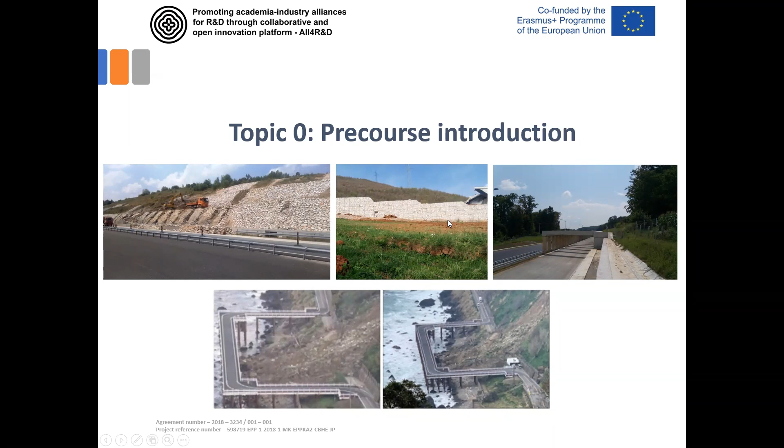Today we won't go very much into details regarding the outline of this course, but we will discuss some details. What are we planning to do in those 10 hours of lectures? We'll define the outline of the course and show you what we'll work on and discuss. So the title of this course is, as you know, landslides in highway construction.

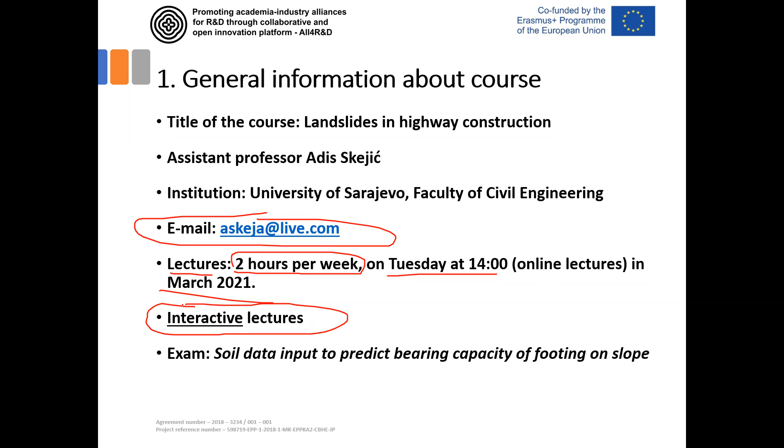Regarding the exam, we won't have a typical exam where we ask you for something and you give answers. It will be some kind of interesting content where I will give you one practical example. We'll prepare this exam question at the end of this course, and I'll prepare one practical example with soil data input. So you'll all have some slope. There is a surcharge from some additional load, such as a foundation of a structure built near the slope area.

And then I'll ask you for some input parameters of this material to try to predict the result of this problem. The result can be to predict the bearing capacity of this footing on a slope, or just to define the load settlement curve for a problem of this kind.

So you will all have the same input data about soil, but you may use different theories, different empirical approaches, numerical approaches to gain the results, and probably the results will all be different, and we'll then use all of your results to prepare some discussion about it and to try to gain some knowledge regarding the design of structures or roads on slope areas, similar to the thematic we are discussing here.

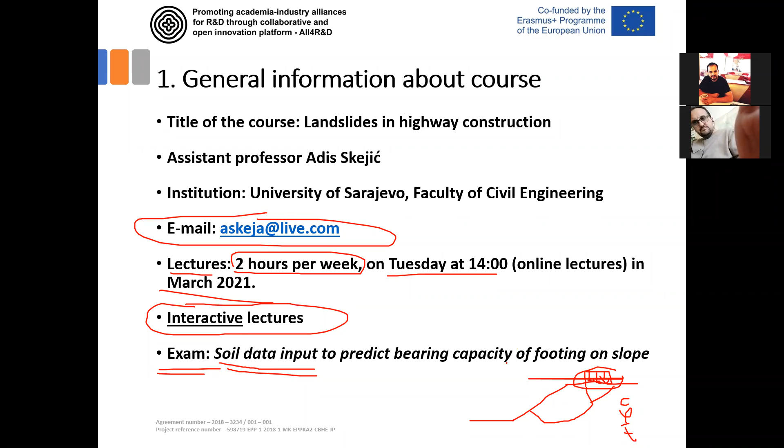A short description of the course can be separated into these 5 groups: 1, 2, 3, 4, and 5. The first one is the introduction, where we'll spend some time today to discuss this issue and present some basic information about the subject. The name of this subject is landslides in highway construction, but at the beginning we have to separate 2 aspects of this problem.

The first one is the building of highway construction in landslide areas. That's one possible problem, that we need to pass our highway through some landslide area, areas prone to sliding or potentially unstable areas. And the other, less frequent problem is that we have landslides activated due to highway construction. So we definitely need to separate these 2 problems.

The one we have at the beginning, before we construct the highway, is highway construction in landslide areas. Then we have to be prepared to construct the highway, to prepare some structures, drainage, and so on, so that the highway is functional and stable during the next years of exploitation.

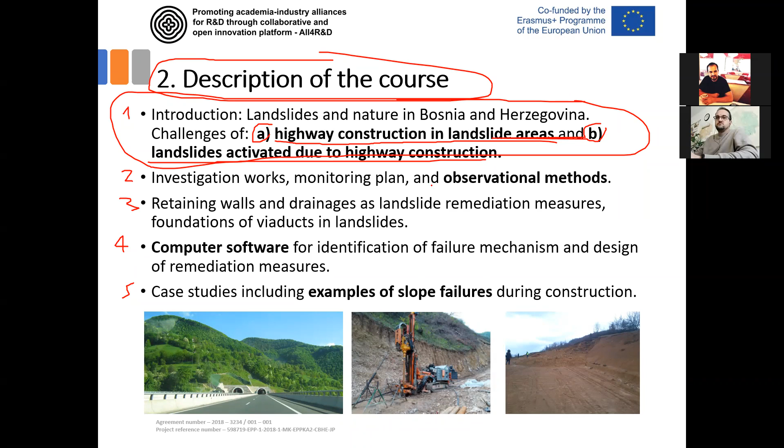So I'll discuss some basic information here, and I'll give some local experiences from the highway construction in Bosnia and Herzegovina, with some practical examples in both of these cases, A and B. That will also be the first part of these lectures, the so-called introduction, where we'll discuss some basic mechanisms of sliding, and the most often landslide types observed in the local highway construction practice.

The second part of the lectures will be the discussion on the investigation works. That means the engineering geological investigation works that are the first part of route planning before the highway construction, but also later, if some sliding occurs due to highway construction, we can do investigation work to try to understand the sliding and soil failure mechanism.

Additionally, with the investigation work, we'll discuss the importance of monitoring in solving landslide related problems. We'll describe different types of monitoring techniques that are used during the remediation of landslides, no matter whether they are active before the highway construction or after the highway construction.

Finally, in this second part, we'll discuss one very important and very often used design method in practice, the so-called observational method design. We'll define different approaches of these methods that are really very often used in worldwide and local practice as well.

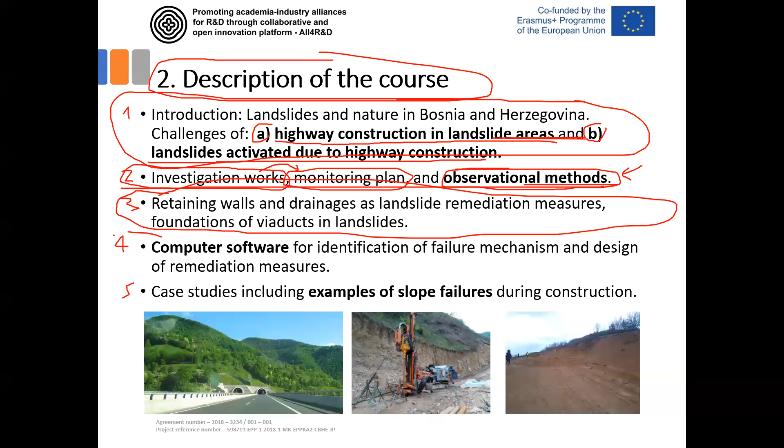The fourth part of these lectures will show you some details of computer software that is used for identification of the failure mechanism in the first phase, and then for the design of remediation measures after we have identified and confirmed the failure mechanism observed at some particular location.

Nowadays, different types of computer software are used. Some of them are based on the limit equilibrium concept, and some of them are stress-strain numerical analysis. And there are so many programs used worldwide. We'll show some details and capabilities of different techniques for solving all kinds of problems, like foundation of viaducts in landslides, remediation of a failed slope during construction of the highway, or simulation of a highway route passing a landslide that requires retaining wall construction or counterweight design.

We'll show different examples and different solutions of how it can be combined with computer software programs to predict the safety factor as the main aspect, showing the stability of a slope before and after remediation.

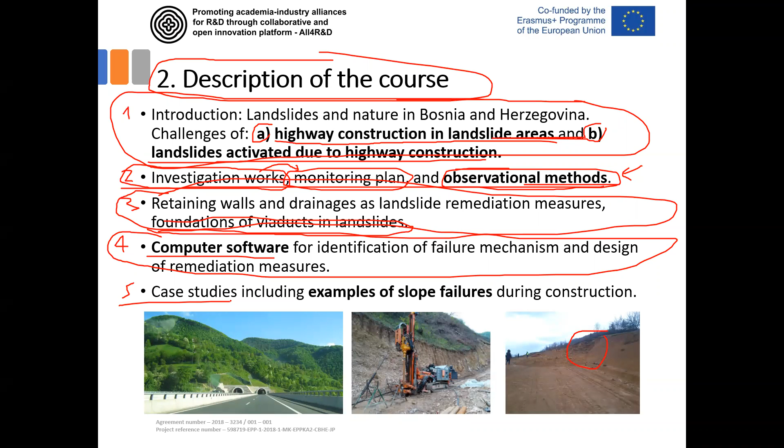Part 5 includes case studies and different examples of slope failures during construction of the highway. All of these case studies are actually local examples from Bosnia and Herzegovina of failures, with details of investigation work, monitoring performed, computer software analysis, some drawings and details of the remediation measures, and some useful information, problems and solutions performed during the construction of the highway in these kinds of areas.

This subject that relates highways and landslides can be found in the literature. Well, we are not the only area in the world where this problem is occurring. This problem is really worldwide. You can find plenty of slope failures that cause large problems, not only during construction, but even after the construction of highway. Here are some examples from New Zealand.

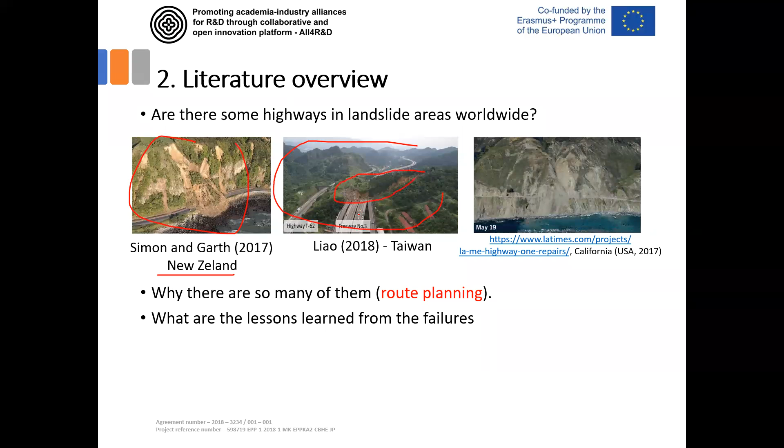An example from Taiwan, where all the hill practically slid down to this constructed highway. Here is one GIF video showing the failure of the rock slope in California, USA. It's all from the near past. So this is not something new. This is something that is happening very often worldwide, not only a local problem.

Why are there so many of these failures worldwide? Well, one of the most important problems is actually route planning. Route planning is really something that a lot of time should be spent on when discussing the way some route will be located, will be planned.

Some expert that is doing the route planning should really have a lot of experience, and he should be a practitioner not only in one subject, not only a road engineer, not only a geological engineer, not only a bridge design engineer. It should be a person that knows a lot from all these areas. And it's not easy to find a man with that kind of capabilities.

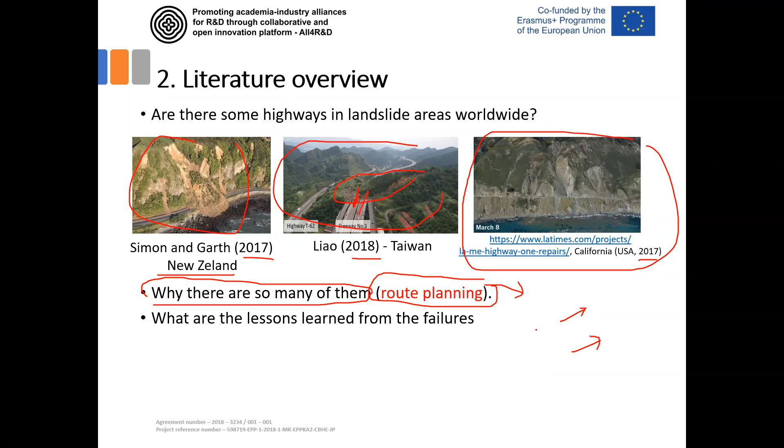before it becomes too late and you already have some structure constructed, and then you start dealing with the landslide prone area, potentially unstable areas, and then you have to spend really a lot of energy, a lot of money to construct a road in such conditions. And even after that, you're not totally sure that you have a stable, long-term, and safe construction.

That's also a part of this last sentence, to show you some lessons learned from the failures. Every time we observe some failure, we can easily predict it in the future, and we can escape it in some future work.

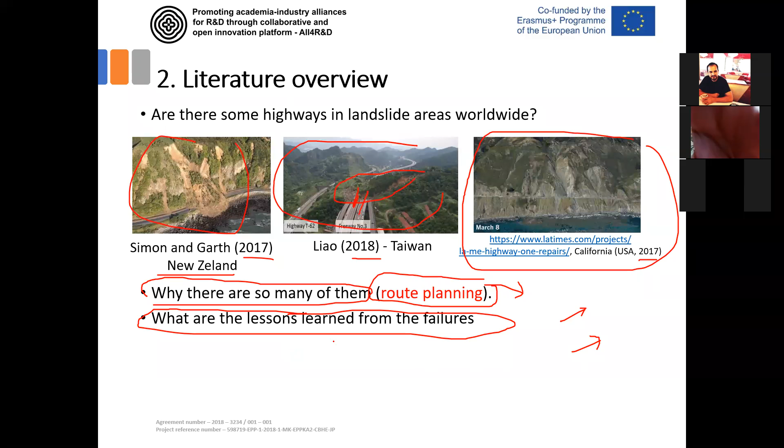Some aspects of slope stability we actually won't discuss in this course, and it's often a problem during highway construction. I sorted them in two problems. The first one is so-called mud flow, where you have a surface erosion that can influence the functionality, the serviceability of the highway route. And the other problem is rock mass instabilities.

Because it's not that rare that we have some deep excavation, not in soil but in rock mass, and deep excavation in rock mass can be as critical as the slopes in excavations in soil, especially if you have very weathered, not so firm rocks. But as I said, we won't discuss that. It may be part of some other subject, of course, but I found it useful just to say what we will not discuss.

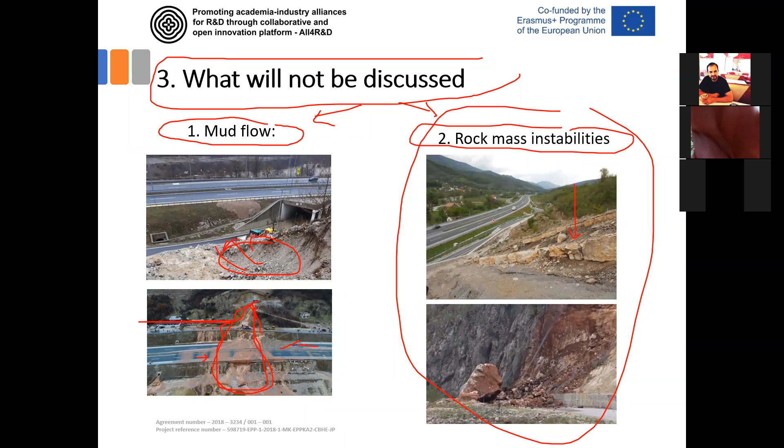That's one part we won't discuss, and the other part is rock mass instabilities, because every time we have deep excavation, even if it's in rock, it can cause some instability that could bring a lot of problems during and after highway construction.

What should be the learning outcomes after all these lessons? Well, first, and that we'll discuss in detail today, is a typical landslide mechanism for the landslides in Bosnia and Herzegovina. Unfortunately, I don't have much experience of landslides worldwide or in other countries, but what I can discuss is the sliding mechanism observed in most of the landslides activated during the construction of highways in Bosnia and Herzegovina. I'll try to share that experience, but I believe that similar conditions can be expected in the neighboring countries.

And this is something linked with the first part we'll discuss today. This is the part about how the landslide starts, why it starts, what are the main reasons for landslide activation, what is the failure mechanism, what are the basic elements of a landslide, and we will discuss this today.

As we said before, we have these five major topics, and every topic has some learning outcomes. The following learning outcome is that we'll show the importance of the investigation works, monitoring works, and observational methods in prediction of slope failures, in construction of the highway in landslide areas, and in the remediation of landslides if it's activated after the highway construction.

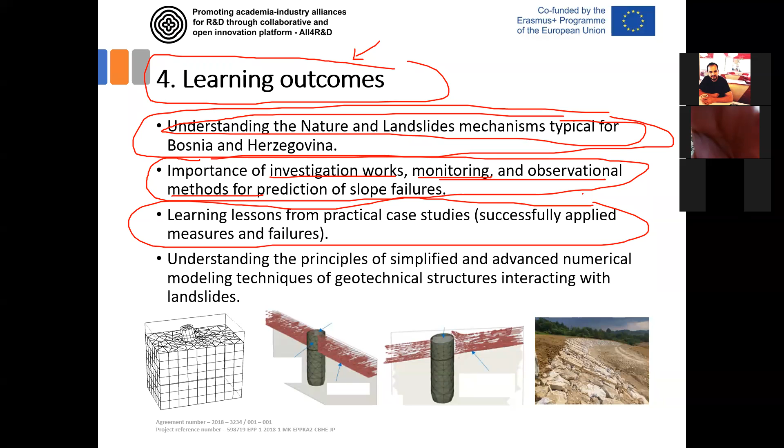For every case study where we had some failures, some sliding of the soil, some problems with the serviceability of the highway, we'll show the case studies. We'll show the details of applied measures and failure mechanism, and the outcome should be that we learn something from those practical case studies and then try to escape similar problems in the future when we are dealing with this kind of problems.

Also, we'll try to explain so you can understand the principles of some simplified and advanced numerical modeling techniques of geotechnical structures that are interacting with the landslides. So we'll show what information we can get from numerical simulation of retaining walls, anchored walls, and deep excavation of foundations in the landslide area.

As I said, we'll show the details of one practical example where the highway viaduct passes in a very deep landslide area, and then we'll define some main aspects of the design of such a complex foundation structure.

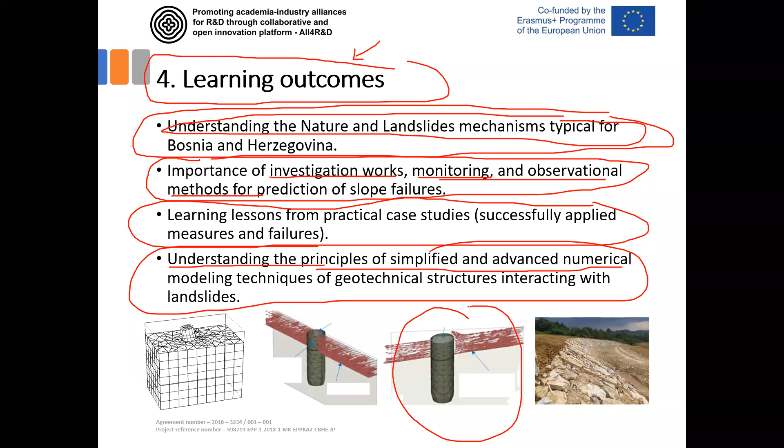Of course, we don't have time to explain all the details, but as I said at the beginning, if you have something you're interested in, you can always stop me and ask for some details, and even further, if you want to go deeper in this subject, you can try to prepare some calculations, try to prepare some design, and send it to me to check it and to give my feedback on that if I can help you at all.

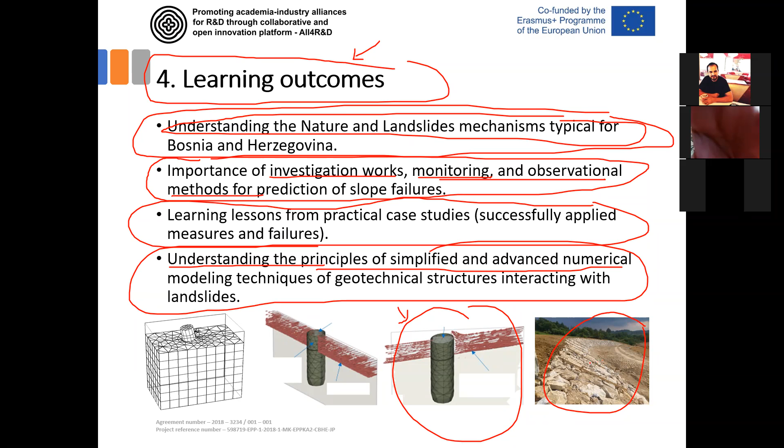So we'll discuss deep foundations, retaining walls, counterweights, stone column materials with drainages. How can it actually be modeled, to introduce it into the calculation, and then to check the safety factor of these conditions with the support measures?

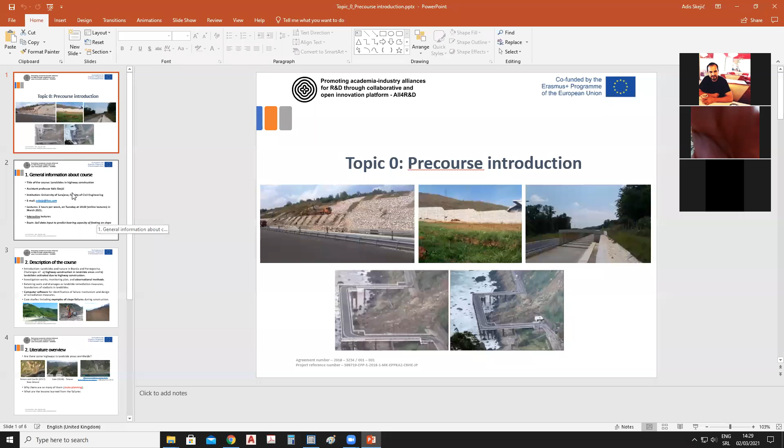Okay, that was a so-called pre-course introduction where I just introduced what we'll discuss in the next 4 weeks and some part of it today. So the so-called rules of the game are that you can follow the online lecture, and to make it more interactive, you can ask me something, I can answer it if I know, so we can discuss it. And if not, I'll send you the video link so you can follow it later when you find some time for that.

And at the end, we won't have a typical exam. It will be just like a kind of game where I'll give you some geometry and soil input data or some field test result data. So you can then interpret the field test result data to get the input parameters and do some theoretical or empirical approach to predict the bearing capacity or load settlement curve of some foundation on a slope area.

So it's somehow linked with this subject where we have highway construction on slopes, and then we'll collect all of your answers and do a short discussion of why the results are the same, why they are different, where the differences are, what you often use as the principle of interpretation, and what you often use as a theoretical, numerical, or empirical approach for predicting the results of some problem.

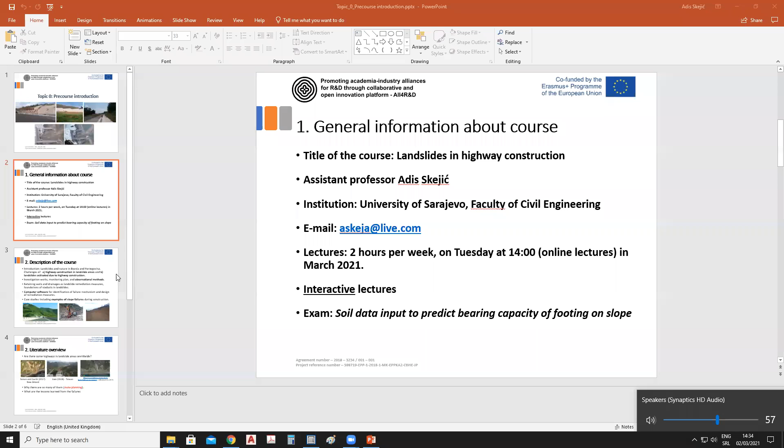We may add some details about that when we discuss the retaining walls part that I introduced here. This is retaining walls and drainages as landslide remediation measures. Actually, in this original presentation, I didn't prepare any details on soil nailing or rock nailing techniques, but why not? I can add a few slides that will discuss

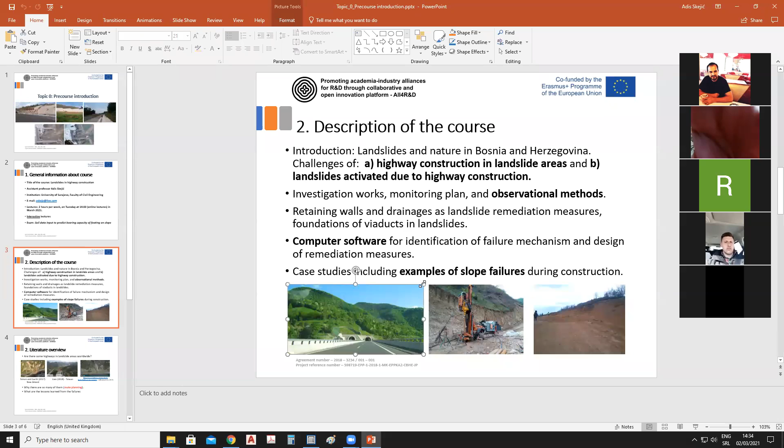tunnel entrance construction. We have one similar problem in our case study part. In the case study part, this is this problem. What happened here? This was a temporary construction of the tunnel portal here, but after that, it was designed to prepare this long-term condition, and this is a reinforced earth slope. Reinforced earth slope that will support this temporary construction of the tunnel portal. That is actually rock nailing, and this was a rock slope here.

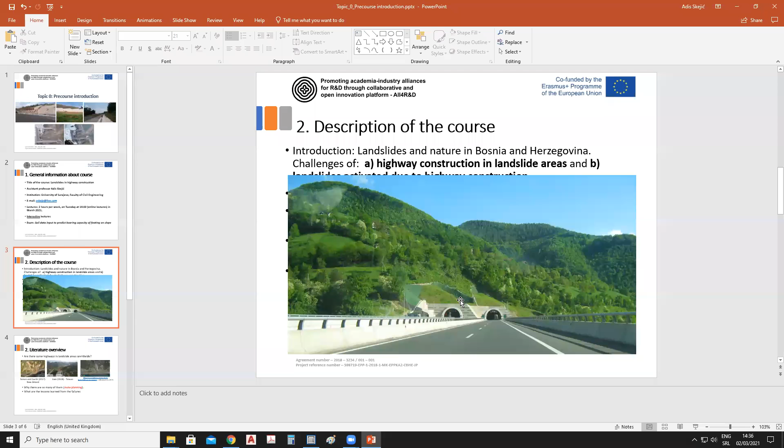But the main problem occurred here during the construction of this reinforced earth slope. After the construction of this slope, failure occurred and influenced the stability of this area. So some supporting measures were performed here to stop this sliding. So it's a little bit linked to this theme, not directly, but we can add a few information about how it works, since this portal construction is often temporary, not always, and then it is supported by some construction like this one here.

So the answer is that we will give some information concerning that. But you can see here, this is soil nailing as a temporary support, and this is a long-term support, this reinforced earth wall.

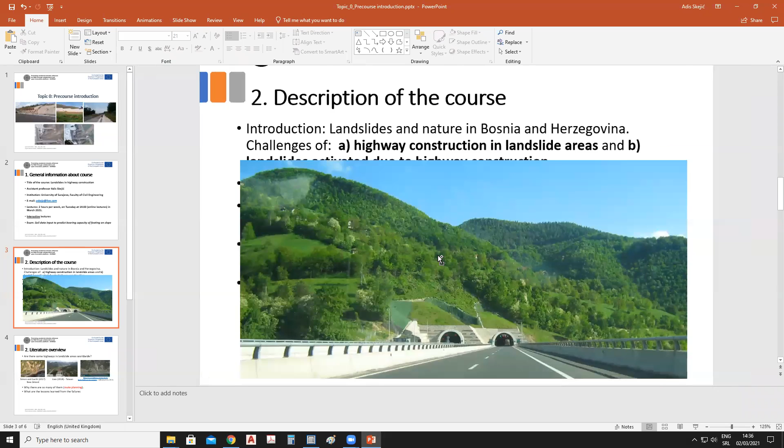Okay, thank you. Sorry, the reason that I asked that question is that I'm currently working in highway here in Macedonia, and at the first stages of the digging of the tunnel, it fell right on the entrance of the tunnel while digging. So some of the engineers thought the slope wasn't stable enough to retain that load. So that was the mistake. That's why I asked that question.

Yeah, actually, I didn't get it. The connection is really poor. I couldn't get everything you said. Okay, I'm gonna try to repeat.

The reason I asked the question is that I'm currently working in a highway construction project here in Macedonia, and we were working on the tunnel. The tunnel started before I was employed here, but they told me that when they started the first phase, the tunnel fell right at the beginning of the digging, right on the entrance slope. So some of the engineers told me that it fell because the entrance slope was not stable enough to retain that load.

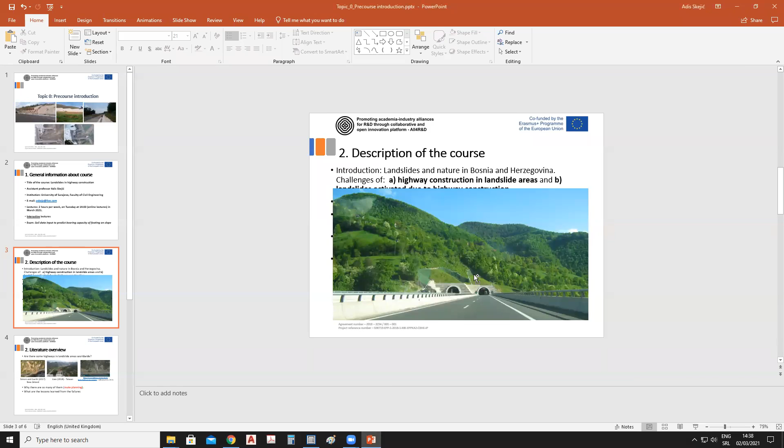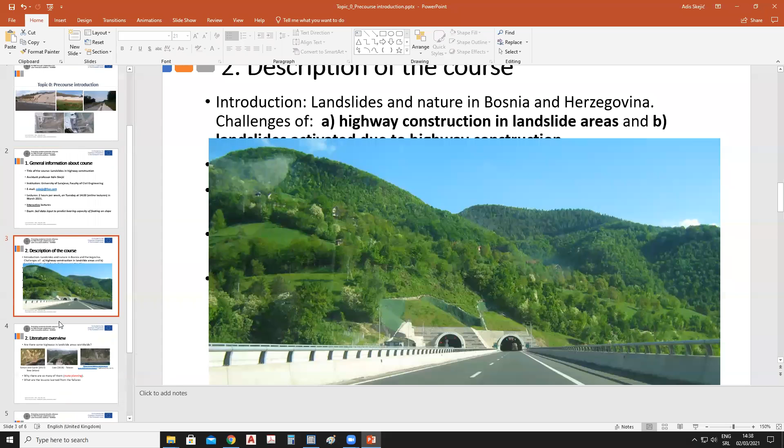Okay, I understand. This is like on this figure, like you had this slope failure here, if you don't have an appropriate support measure. Yes. But as the support measure usually used here is soil nailing, I'll add these support techniques when I start this part of the retaining walls. That's the kind of retaining wall that is used for slope protection at the portal entrance, tunnel entrance. Okay, any more questions?